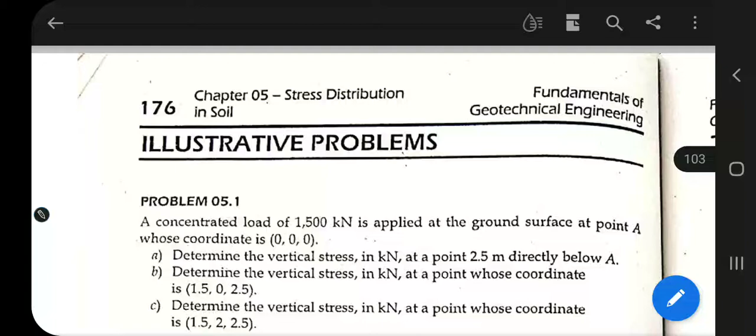Okay guys, here are some illustrative problems regarding our topic, stress distribution in soil. The first problem: a concentrated load of 1,500 kilonewton is applied at the ground surface at point A, whose coordinate is 0,0,0 at the origin. So this is 3-dimensional, and at that point our 1,500 kilonewton point load Q acts.

Now the question is, at point A, determine the vertical stress in kilonewton at a point 2.5 meters directly below A. So directly below A, the coordinates would be 0, 0, 2.5 - that's the lowest point. The question asks for the vertical stress in kilonewton. So the coordinates for part A are x=0, y=0, and z=2.5 meters directly below. What is the stress there? Only vertical stress exists there.

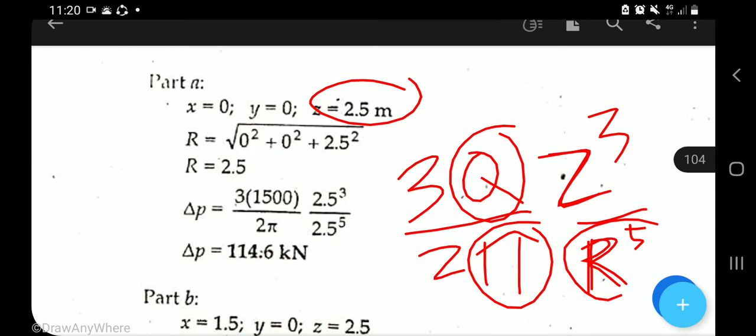To find that, we need to use the formula for delta P, the vertical stress increase due to a point load. The formula is delta P equals 3Q over 2 pi, times z cubed over R raised to the 5th power. The R is the distance - we use the distance formula for that. Q is the load, pi is a constant, and Z is our 2.5. For R, using the distance formula: 0 squared plus 0 squared plus 2.5 squared, we can get the value of R.

So 2.5 is the answer for R. Then we do direct substitution to get delta P. Substitute 1,500 for Q, since in our derivation last time, the big Q represents load in force. So 1,500 kilonewton is our point load Q. Substitute that, and for Z, which is clearly 2.5, and R raised to the 5th. Then calculate, and we get delta P, the increase in vertical stress 2.5 meters below the point load, equivalent to 114.6 kilonewton.

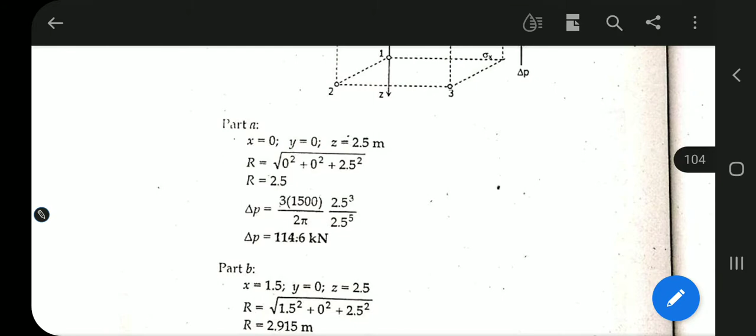So for letter B: determine the vertical stress in kilonewton again at the point whose coordinate is 1.5, 0, 2.5. So for letter B, the x coordinate is 1.5, y is 0, and 2.5 is the depth. The x of 1.5 is here, and y is 0, so no movement in that direction, just going down 2.5. That's what's being asked - what is the vertical stress at this point 2?

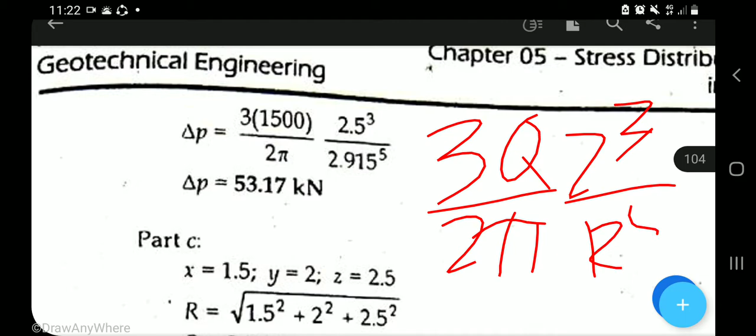Given our formula for point load again: delta P equals 3Q over 2 pi times z cubed over r raised to the 5th. But this time, different coordinates are being asked, a different position - unlike before, this isn't directly below the load's point of action. This time we have x=1.5 on the x-axis and z=2.5. By recognizing these coordinates, we can find the value of r, since we need it for the formula 3Q over 2 pi times z cubed over r raised to the 5th.

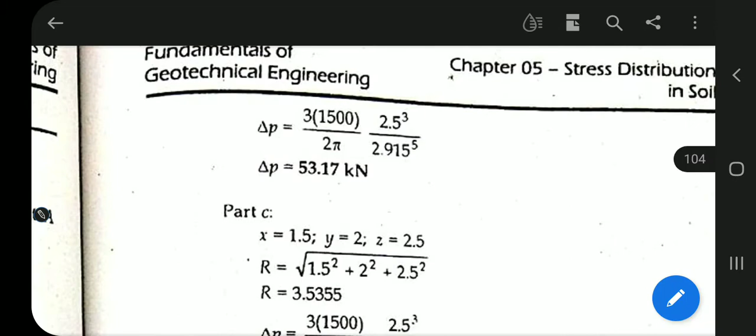Okay, so we get R equals 2.915. Back to the formula, substituting, then typing into the calculator, we get delta P as easily as this: delta P equals 53.17 kilonewton at this point. So the change in vertical pressure is 53.17 kilonewton.

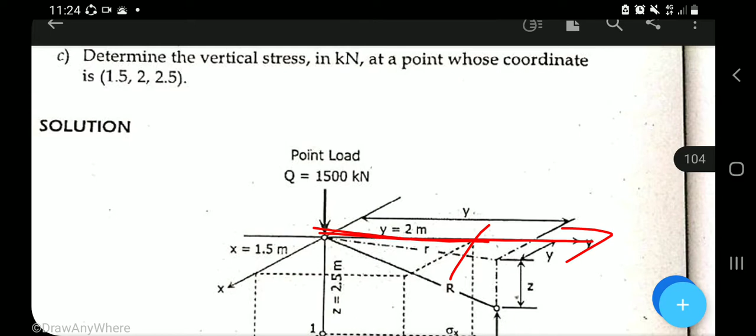For part C, determine the vertical stress in kilonewton at the point whose coordinate is 1.5, 2 meters, and 2.5. So our x is 1.5, going here. Then 2 is our y, counting up to 2. Then 2.5 going down in depth - that's what's being asked. We can get an R value from this. That's what's being asked: the vertical stress or delta P here. This is also equivalent to sigma sub Z, the vertical stress.

Change in vertical stress, okay? So ang gagamitin natin doon is yung equation ni sigma sub Z, kasi vertical lang yung tinatanong. At ganun lang ulit sa pagkuha kanina.

So using the distance formula: 1.5 squared plus 2 squared plus 2.5 squared, and that is equivalent to r squared. And then finding the value of r, we will get the answer 3.5355. So for the value of r, yon.

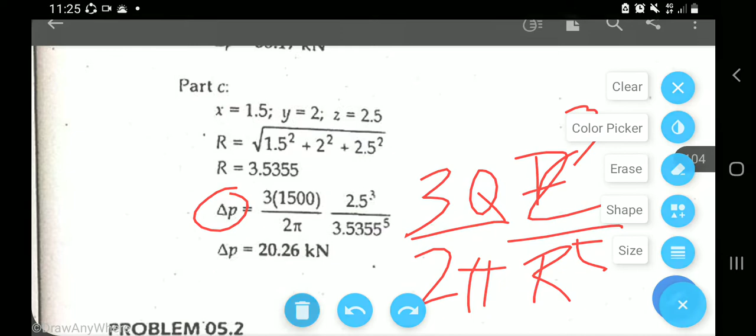And then substitute natin doon sa formula of the vertical increase in stress, so delta P: 3q over 2 pi times z cube over r raised to 5. So yung z natin, ayan, lipat doon, and then ito, substitute doon, and then type sa calc, we will get the delta P for that coordinate equivalent to 20.26 kilonewton. Okay, so that is an example of a point load, the vertical stress due to point load.

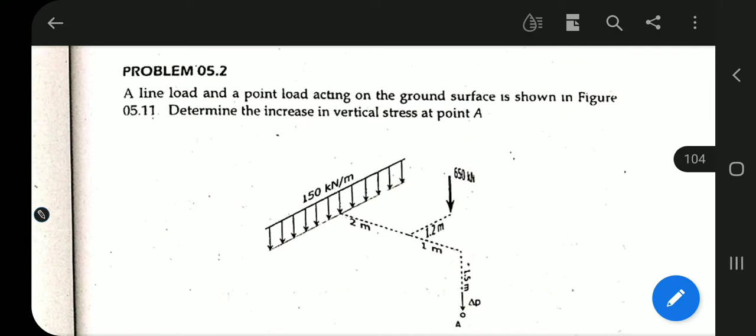Okay, now problem number 2. A line load naman and a point load. O, dalawa, isang line load at isang point load, so pinagsama. Acting on the ground surface is shown, figure 5.11. Determine the increase in vertical stress at point A.

Now, the vertical stress at point A from the line load is 3 meters, as you can see in the figure, 3 meters from the line load and 1.5 meters below that line load. Okay, and a point load is here, and that is 1.2 meters from the origin, and 1 meter from the origin also.

So ito yung x-axis and ito yung y-axis, and yung pababa, yun yung ating magiging z-axis. Yan, so yun yung mga coordinate. And because of that line load na ipinatong natin, and also the point load dun sa ground surface natin, magkakaroon ng change in vertical stress dun sa ilalim niyan, dun sa point A na yan, 1.5 meter below, delta P.

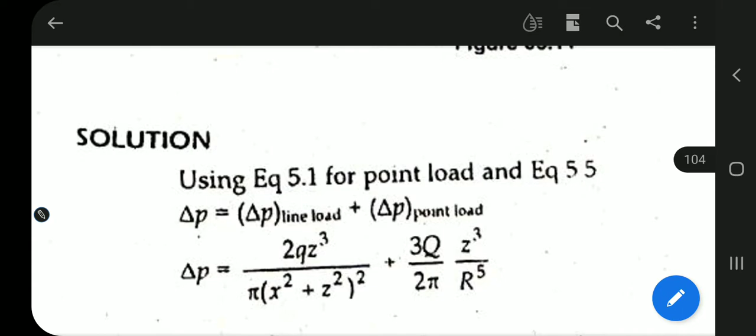Yan yung nandun sa ating lecture, ano? So 2QZ cube over pi. So this is due to line load and this is due to point load. So all we need to do is to find all the correct value for those parameters and variables.

Ano, so yung Q natin dito, yun yung line load natin. And then yung Q ditong malaki, that is the point load. Okay, and then yung Z, ay alin yung lalim? Yan yung lalim, ano. And then yung X, that is yung dimension na nandito. Ayan o, yan, so this is the X axis. Yan, so X yan. And then pag ganun yung Y. So and then pag ganun yung Z.

Ingatin, okay? So due to this line load and point load, magkakaroon ng vertical change in stress dun sa ilalim, dun sa point A. So ang kailangan natin is punan lahat ng mga value.

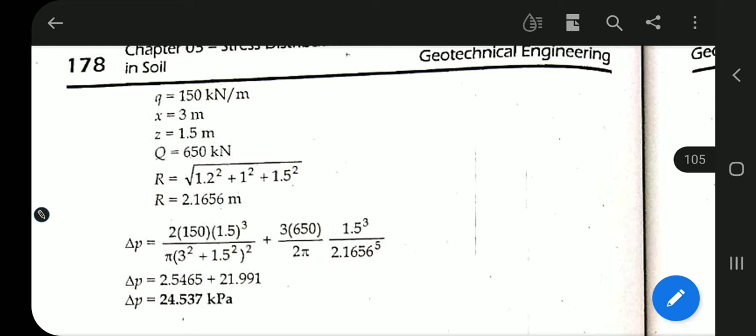So kunin natin si Q, itong Q maliit, okay na yan. And then yung Z natin, ito yon, yung Z, that is 1.5. Z natin, that is 1.5. And then yung X dito, ang ginamit niya is 3, kasi ang ginamit niyang axis papunta dito is 3. Okay, so dapat di ba pagka line load ay perpendicular dapat, okay, yung layo. Okay, so ito dapat perpendicular, di ba sabi ko? Okay, yung distance ito yung 3 and yung lalim that is 1.5.

So yan, so nasa line load pa lang tayo, line load. Okay, kung line load, then kunin natin yung R: 1.2 squared plus 1 squared plus 1.5 squared. So ito yung natin for the point load siya.

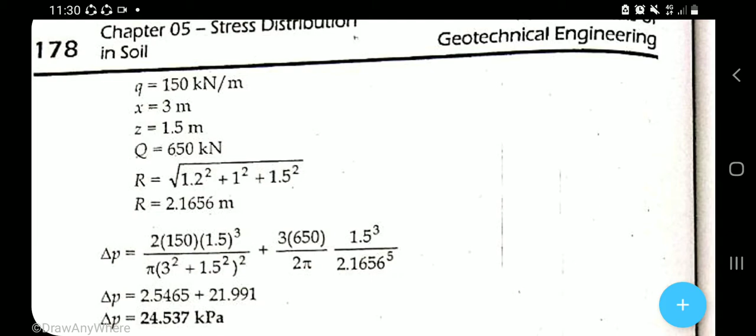So sa line load muna tayo. Yung ating punan natin yung formula, yung Z. So X at Z lang naman yung kailangan and then yung Q. So yung X is ito na, 3 meters, and then the Z is yung lalim. Ano ba yung lalim niya? 1.5 yung lalim niya.

And then substitute natin, ang mangyayari dyan is ganito: so ito yung 2Q, so ito yung Q, yung Q na maliit. And then ito na yung Z natin, Z cube. Ayan, at ito pi, constant. So ito yung X, and then ito yung Z. So yun lang, and then ipa-plus natin combination ng point load and line load.

So this is due to point load. So kailangan natin ng R. Ito yon, substitute doon, so maliit na yon. And then yung Z is the same lang, so 1.5.

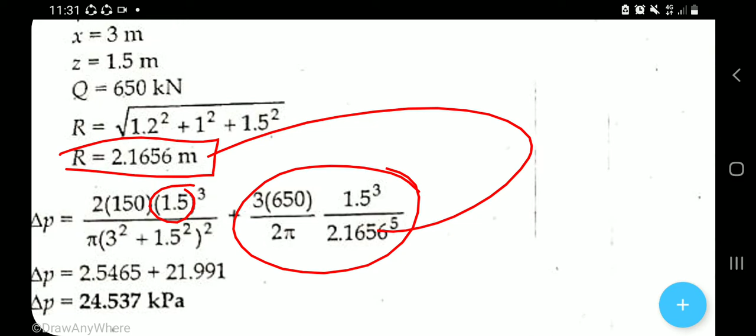And yun, ito naman yung Q natin, that is in point load siya, so in kilonewton, in force yan, 3Q over 2 pi. And then substitute na lahat, then calculate na natin, makukuha na natin to, and then the final answer would be equal to 24.537 kilopascal. Okay, that is an example of the combination of the line load and the point load action, dun sa ating lupa. So yan.

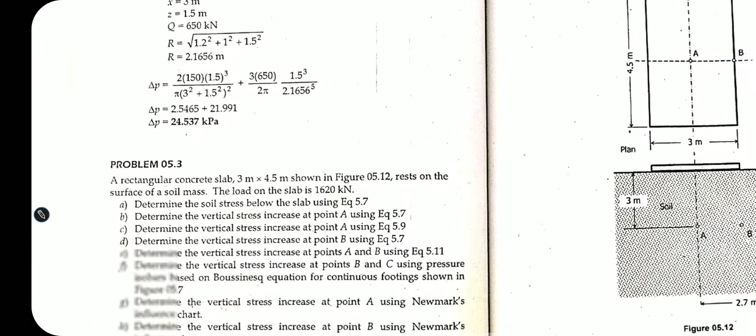Then problem number 3. So a rectangular concrete slab, slab siya. So alam naman natin ang slab, parang flooring kumbaga, and then 3 meters in dimension niya and 4.5 meters shown in the figure 5.12. So 3 meters and 4.5 meters yung dimension niya. And then rest on the surface of soil mass. So nakapatong siya dun sa ating soil mass. Okay, kung tawagin sa iba dyan sa site, slab on fill.

So the load on the slab is 1,620 kilonewton. So ito na yung load, ito na yung mag-a-act dun sa gitna. Okay, so kung may rectangular ka, so ang sabi is the load on the slab and in kilonewton siya, dun siya sa gitna mag-a-act, yung 1,620. And determine the soil stress below the slab using equation 5.7.

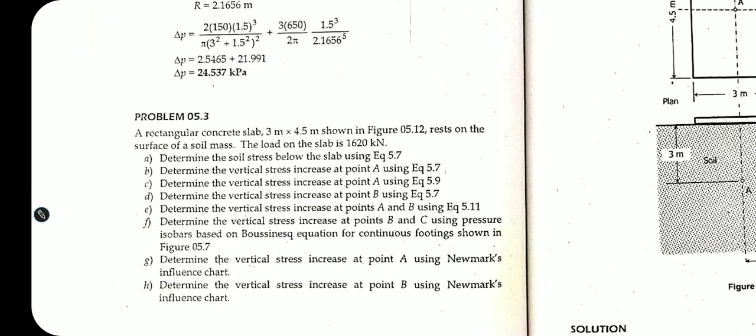So determine the soil stress below the slab, sa gitna. Okay, so ito yung plan, 4.5 by 3, concrete slab resting on the soil surface. Ito yung plan, and yung section niya, yung transverse section niya, ito. So kasama yung lupa. And then at point A, yun yung tinatanong. Okay, so 3 meters below the soil surface.

So yun yung tanong, determine the soil stress below the slab. Okay, so using 5.7. Ano pa lang to? Stress pa lang, below the slab pa lang. So yung stress na lumalapat pa lang dito. Okay, dito. Ito, yung stress dito na stress in contact with the soil and the slab.

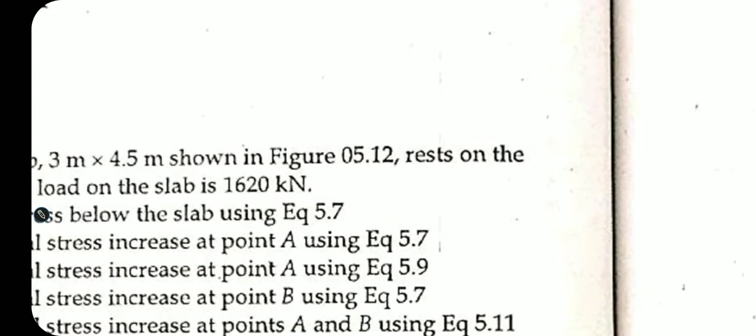So paano makukuha yun? So using the concentrated load at sa gitna, divide lang natin ng area. Yung area of surface of contact. Divide natin dyan yung force dito. Okay? So that is 1,620 divided by 4.5 times 3. So yun yung mangyayari sa A, sa ito. So 1,620, parang stress lang, P over A. Parang P over A, compressive stress. Or shall we say, the bearing stress. Yan, 1,620. Ito yung P, yung force, and area, 3 times 4.5. We'll get the stress below this slab equivalent to 120 kilopascal. Okay? So yun yung mag-a-act doon sa ilalim.

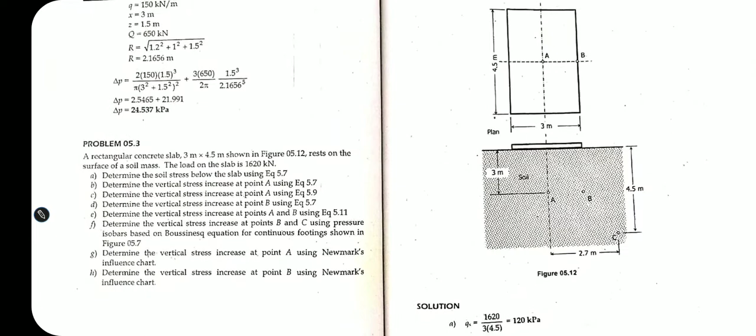Dito sa pinaglalapatan nito. Yun yung puwersa. And then number 2, letter B, determine the vertical stress. Ito na. When we say vertical stress increase, yan yung ating delta P. Okay? At point A, using 5.7. Okay? Using 5.7 na equation daw. So at point A, so nasa gitnang-gitna siya. And 3 meters below. So magiging Z natin dito is 3 meters, at gitnang-gitna siya. So yung equation for that 5.7,

so ito yung ating, yung sa may corner, yung I sub Z. Yun ang kailangan, yung may I sub Z. So QS times I sub Z. Yun. Okay, and that I sub Z ay may formula na napakahaba. But in this example, ay sa table niya inirefer. Table 5.2. Okay, so compute natin.

That is the vertical stress at the corner. Okay, vertical increase stress at the corner of a rectangular loaded area. Okay. So nasa gitna, ang tinatanong, nasa gitna. So sabi, kapag ganyan, using 5.7, hahati-hatiin daw natin yung ating slab. Na kung saan yung corner ng bawat rectangle na mahahati ay magko-coincide or intersect doon sa point of desired, yung point required, kung saan required yung ating stress increase. So mangyayari dyan, ganito. Ayan.

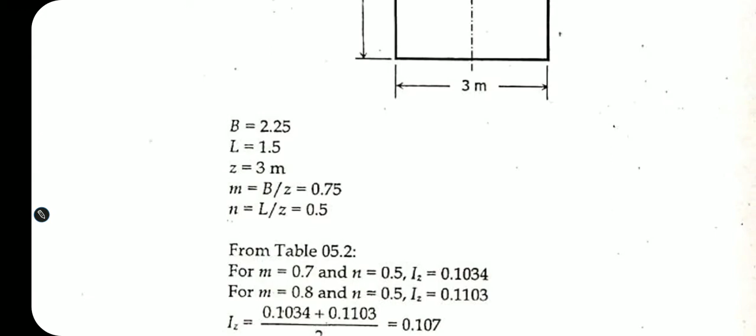So ito yung hinahanapan natin. So divide natin. So since nasa gitna, madi-divide lang siya into 4 equal parts. And that is, the center would be at this point, 1.5 and 2.25 yung kanyang base and length. So yung base is this time, baligtad. Kahit naman magkabaligtad to, okay lang yan kasi commutative property doon sa ating kapag I sub Z ang hinahanap.

Kapag ganito using this formula, no, kapag I sub Z, pero pagka I sub 4, I sub 3 ay iba. Okay, dapat i-consider natin na yung base is always less than or equal to the length kapag ganon dun sa kapag I sub 3. Okay, and then consider this rectangular area, itong shaded area. So consider natin yan and kunin natin yung vertical stress at this point. Drawing natin ng nakaganyan. So yung vertical stress dito, okay, sa point na yan. So ito ay 1.5 and ito is 2.25. So ano yung vertical stress at the corner?

Sa point, doon tumama sa point A. Okay, so using the formula delta P equivalent to QS times I sub Z, we have to first find the I sub Z using table 5.2.

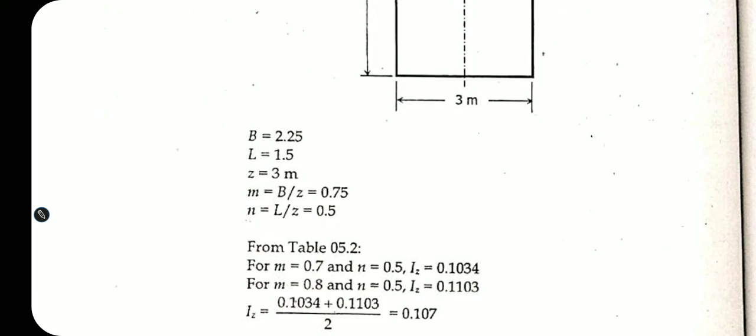Or using formula 5.7, but we need to find the values for M and N. The M is the ratio of the base and Z, and N is the ratio of the length and Z. So our base is 2.25, divide natin ng Z. Ano ba yung Z? Lalim, 3 meters. And ito yung magiging sagot.

And then the value of N is L divide Z, that is 1.5 divide 3 equal to 0.5. So now we have the value of M and N. Hahanapin lang natin yung 0.75 at 0.5 doon sa table. Saan ba yung table 5.2 na yun? Dito tayo titingin, balik tayo dito sa table 5.2. 0.7 at 0.5, yung M is 0.7, and then N is 0.5.

So tingnan natin kung saan tumutok. That is 0.1034. 0.7 at 0.5, 0.1034. 0.7 at 0.5, 0.1034 siya tumutok. Ayun, tama. Kaya naging ganito, 0.1034. Okay, kaya lang, ang M natin is 0.75.

Okay, kailangan nating mag-interpolate. Kunin natin yung sa may 0.8, and then yung gitna niyan, between 0.7 and 0.8, nandun yung I sub Z na actual. So kunin natin yan using table 5.2. So M 0.8 and at 0.5 na value ng N, ang value ng influence factor natin is 0.1103.

Okay, so yung nasa gitna ng 0.7 at saka yung 0.8 na yan, yun yung value ng I sub Z natin. So para makuha yung nasa gitna, we have to take the average of the two, or mag-interpolate tayo. So from 0.1034 and 0.1103, from 0.8, pwede tayo mag-interpolate doon. Or mas madali is average na lang kasi equal naman, nasa gitna eh, kasi 0.75. Kaya okay lang mag-average, pero kung halimbawa 0.71, mga ganun, kailangan mag-interpolate.

So 0.7, tapos... sa 0.7 siya, so 0.7 yung M, balik tayo. 0.75 yung M, tama, and 0.5 yung ating N. So M 0.75 and 0.5 yung N. Okay balik, so sa 0.5 yung N, 0.75. Okay so M 0.7, 0.7 siya, and tapos 0.5, ito yon, so 0.1034, and yung 0.75 nandito sa gitna.

E di kunin natin yung value nito, 0.8, 0.1103. So interpolate tayo, pwede nating i-interpolate at this value. So 0.75 yung nandito, 0.75 yung nasa gitna. Okay so 0.75 minus 0.7 over yung kanyang hinahanap, yung value x. Yan na yung I sub Z natin.

Minus 0.1034, and then that is equivalent to 0.8 minus 0.75, divided by 0.1103 minus yung 0.1034. Ayan, ito yung magiging I sub Z natin.

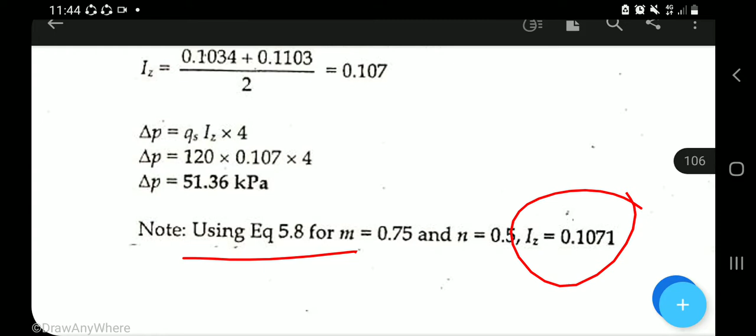I sub Z, so mas madali, yung tawag dito, divide na lang kasi nasa kalahati. So average na lang, nasa kalahati kasi siya, so pwedeng average na lang yan. So yun din yung magiging sagot, ano. So using the equation 5.8, yung mahaba, ang magiging sagot is 0.1071. So almost approximately equal, okay?

And since yung delta P dun sa point na yon is nakuha na natin, kailangan nating i-multiply saan? Sa 4, dahil apat na magkakaparehas to. Apat na magkakaparehas, apat yan, so kailangan nating i-multiply sa 4. Or i-plus natin lahat, summation lahat ng delta P's na yon. Okay, kaya minultiply sa 4 ito.

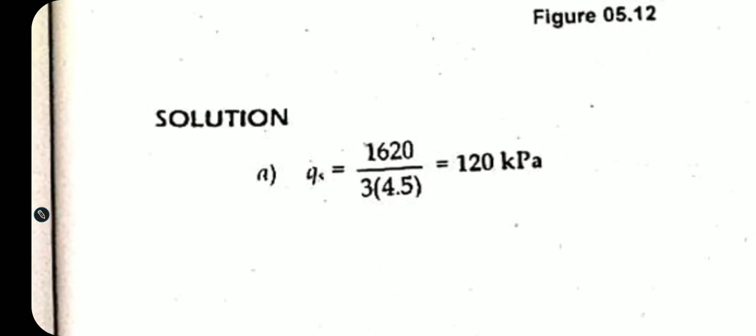Okay so ito, 17, substitute doon, and then 120, ito yung QS natin, okay? So yung QS natin dyan is given, ano? Given 1620, but yung QS na maliit dapat in kilopascal siya. So anong nangyari, ito na yung 120 na to, so divide the contact area of contact. So 120 kilopascal yung gagamitin natin as QS, okay? So yun, makukuha natin na sagot is 37.08.

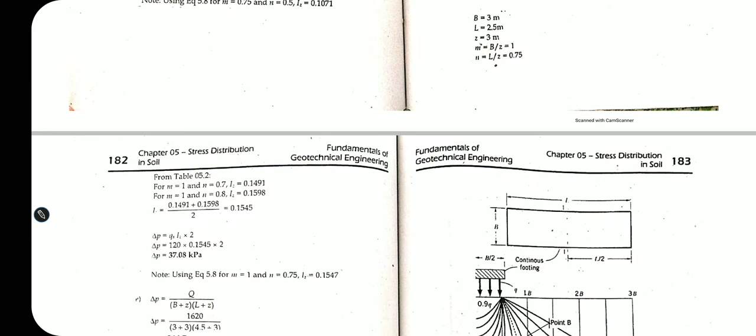Okay, so next question is letter E. Letter E, balik tayo. Okay, so at point A, determine the vertical stress. So at point C, at C pa lang. C pa lang tayo, no? Determine the vertical stress increase at point A using 5.9 naman. So sa gitna, yung 5.9, yun yung ating equation or the formula to find the change in vertical stress at the center of the rectangular block, rectangular loaded area. Ano, yan.

So at point, nasa na yan? So nandito pa lang tayo. So okay, 53, tama, so letter B pa lang to. So yung letter C, ito. So this time is I sub 4 naman ang meron doon. Kapag doon sa, ano, so mahabang formula din to.

Okay, but you can use table 5.3 to find the value of I sub 4. But kailangan natin kunin yung M1 and N1. Okay, so yung M1 is the ratio between the length and the half of the base, or B over 2. Okay, and makukuha natin yung M1. And yung N1 na maliit is a ratio between the Z, yung lalim, over the half of the base.

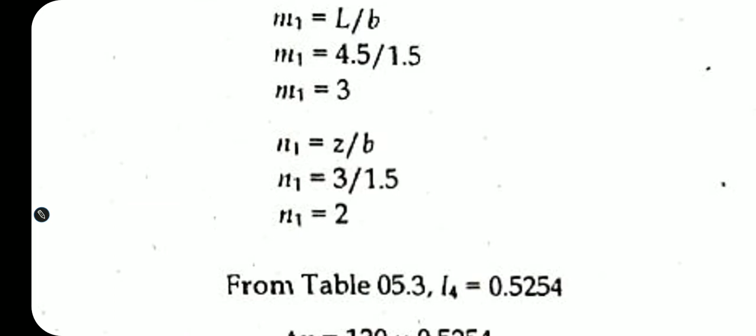So makukuha natin na N1 is 2. Then, using table 5.3, balik tayo sa table 5.3. Ano bang value nga ulit? M1 is 3 at 2 ang N1. Okay, M is 3, N is 2, 32, to find the value of I sub 4, ayun. So 0.5254. 0.5254 ang value ng I sub 4 doon.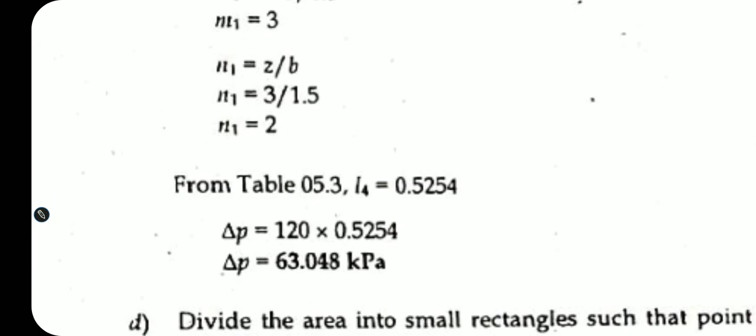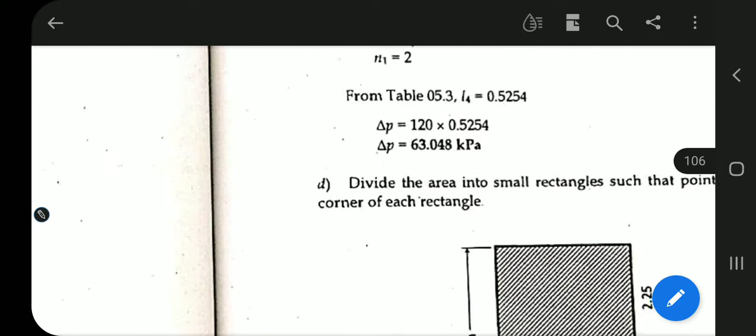Ayun, so tama. From table 5.3, ang value ng ating I sub 4 will be equal to 0.5254. And then use the formula, yung QS multiplied by I sub 4, and then you will determine the value of the delta P, or the increase, the vertical increase in pressure, vertical increase in stress dun sa point na yon. So multiply lang natin. Ayun, ang sagot, 63.048 kilopascal. Okay, yon. So as you can see, mayroong malaking discrepancy.

So 63.048, compare nyo dito. So may discrepancy, kanya-kanyang formula kasi ang nagbigay, kanya-kanyang tao. So i-indicate naman or i-state sa problem kung alin yung gagamitin na method or way, use equation 5.7, use the Boussinesq equation, okay, mga ganun. Use the isobar, pressure isobar, mga ganung bagay. So naka-indicate naman doon. I-indicate natin sa problem. Okay, next, letter D.

Ang tanong is determine the vertical stress increase at point B using 5.7. Nasaan ba yung point B dito sa figure? So ang point B natin is here, katapat nito. But dapat given itong distance na to. So ang point B natin is nandun sa sulok pala, nasa sulok, meaning kalahati nitong B. So 1.5 daw, okay? So 1.5 and 3 meters yung lalim.

Okay, kunin natin, so but using 5.7 kailangan nating i-divide sa to yan. Kasi kailangan, dito ang hinahanap natin dito sa point na sa may point B, dito yung hinahanap na point na stress, kailangan nating kunin yung delta P due to this area. Okay, so due to this area. So paano yan? Divide natin sa dalawa.

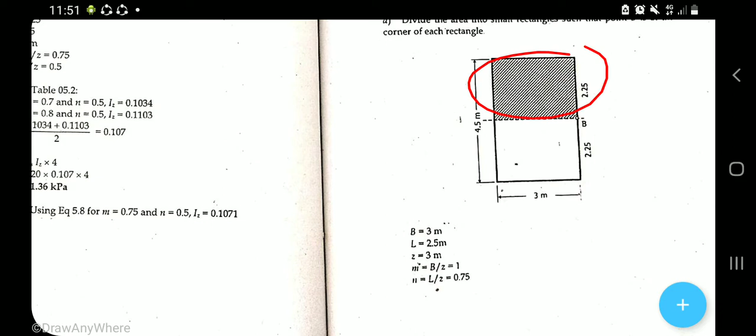Tapos, na kung saan yung point na yun ay magko-coincide sa isang point dun sa point of target natin, point na target nating malaman. So ganyan. And alamin natin yung B. Ito muna, isolate natin to, ito muna natin i-analyze, kasi nasa gitna naman yan. So multiply by ito na lang mamaya. So ang ating B is equivalent to 3, so 3 ito, 3. And this, yung kalahati naman ng ating length ay 2.25.

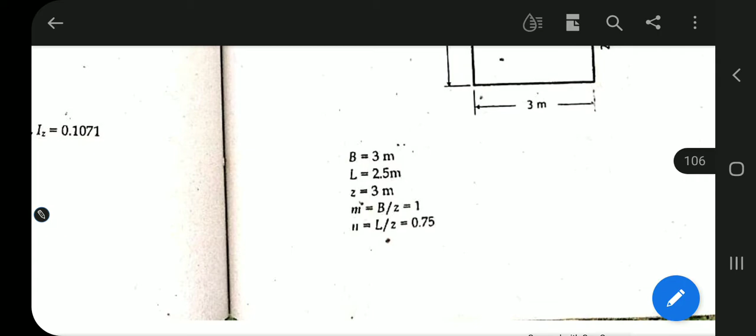Okay? Kasi ang formula para makuha yung pressure at this point, at the corner of the rectangular loaded area is yung QS ulit times I sub Z. Basta sinabing equation 5.7, yan yun. Kaya lang, kailangan nating makuha is yung I sub Z natin. So I sub Z. Ayun, but bago natin makuha yung I sub Z, kailangan natin kunin yung M and N. Okay, using this data, so yung value ng M is 1 and yung value ng N is 0.75. So using table 5.2, kung paano ko binasa kanina, ganun lang yon. Ang magiging I sub Z or the influence factor at M equals 1 and N equals 0.75 is 0.14. Okay, so 0.14.

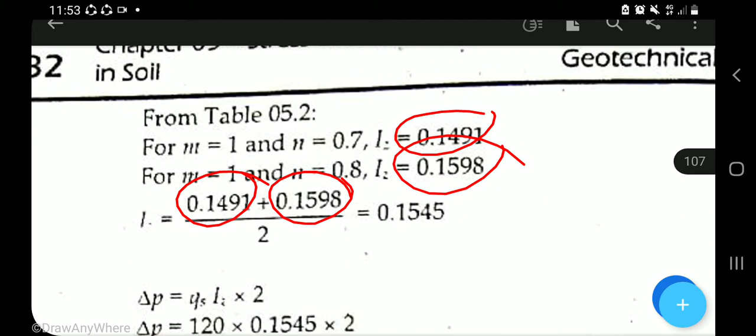Pero pwede nyo naman gamitin na direkta agad ito, substitute dun sa ating formula na mahaba. Ito kasing table na to, table 5.2, dun lang din ang galing dun sa formula na mahaba. Okay, kaya lang hindi sumasakto dito, kaya ang ginagawa is inia-average na lang para makuha yung gitna. Tama, ganun lang. At yan, so since 0.75 nasa gitna, ibig sabihin i-divide to natin to, yung dalawang I sub Z, so I sub Z1, I sub Z2, divide by 2, so ito na yung magiging actual I sub Z natin.

O influence factor na kailangan i-multiply doon sa ating Q sub S. Okay, yan, so and then bakit naka-multiply sa 2? Kasi dalawa ito, dalawa, isa nito at isa nito. Okay, then lalabas yung change in vertical or the increase in vertical stress dito sa point B na to. Yan, so balik, so our delta P now is 37.08 kilopascal. Huwag niyong kalilimutan yung 2 ha, okay kasi dalawa yan. Okay, note, using equation 5.8, we can determine also the value of I sub Z or influence factor equivalent to 0.1547.

Almost equal doon sa ating table, almost the same. Now, letter E naman. Determine the vertical stress increase. Ganun pa din, Delta P ulit yan, at points A and B.

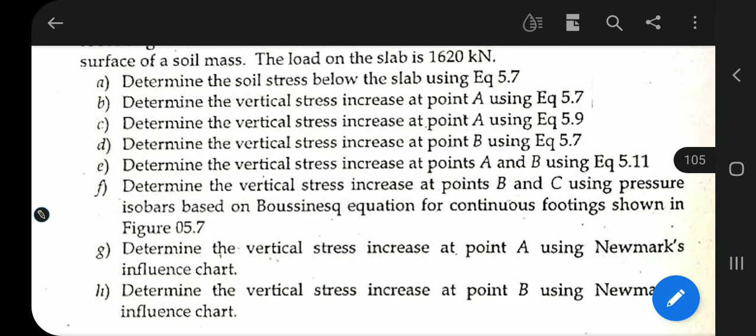Okay, so dalawang tinatanong using equation 5.11. Ano ba yung equation 5.11? Diba ito yung ating approximate method. Okay? So ganito yung ginawa, yung Delta P natin, ganito yung formula.

So using approximate method. Meron ditong Q, yung load slab. And yung Q natin is ito, concentrated. And yung area, yung nasa ilalim, trapezoidal, nasa ilalim. Yan, so ito ay B.

Tapos ito ay Z over 2, Z over 2 din itong kabila. And ito naman yung L. Tapos Z over 2 ito, and Z over 2 yung kabila. Meaning to say this length is B plus Z, and ito ay L plus Z.

Right, okay. Then therefore, the vertical stress at this plane is equivalent to using equation 5.11, the approximate method. So, force over this area. Ano ba yung area nito? Nasa ilalim, yan. So B plus Z times L plus Z. All we need to do is find the value of that B plus Z and L plus Z.

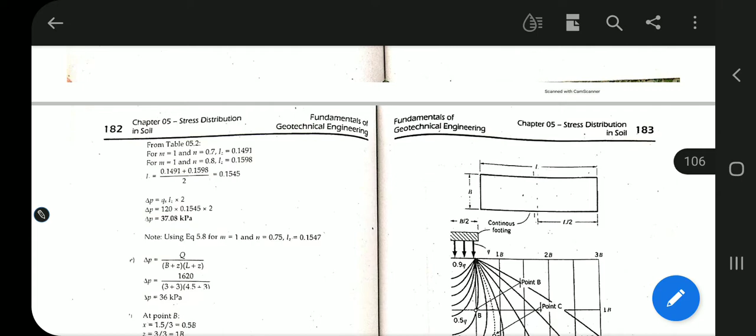Yan, so from the, yung ating B is 3, and yung ating L is 4.5. Right? So yung Z natin, yun yung lalim. Ano yung lalim na yun? So 3 meters. Balikan natin.

Letter E tayo. The vertical at point A and B, so dalawa. So at point A and B, so magkalibel lang naman sila. So meaning, same lang sila ng pressure.

Okay, using the approximate method. Pareha silang nag-lie doon saan? Doon sa ating plane, doon sa area. Plane of area na kinonsider, na we need to consider. Yan, ito yan.

O, kailangan natin tong area na to. And sa kabila, meron din. So kung ito ay B dito, sa kabila na isa, ito na may L. So ganun din, trapezoid din. And then, this length is L plus Z, and this length naman is B plus Z.

Now, multiplying this by this, kukuha yung area kung saan nandun yung point A and B. And then dun lang natin i-divide yung ating Q, yung ating concentrated load na Q sa gitna. And then we will get the approximate value of the vertical increase in pressure dun sa point A and B, equivalent to 36 kilo Pascal.

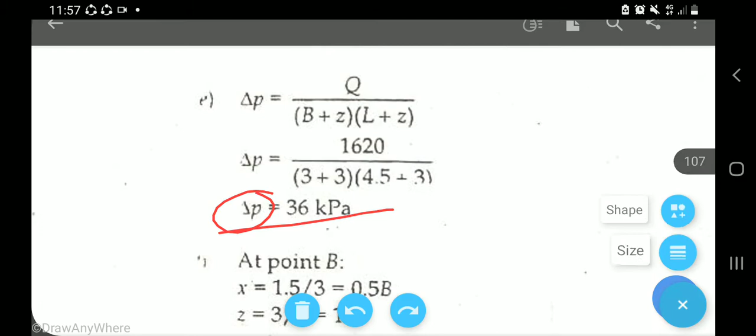Okay, now E. So tanong, EF. Letter F naman tayo, balik. Letter F: determine the vertical stress increase at point B and C using pressure isobars based on Boussinesq equation for continuous footings shown in figure 5.7. Oy, using the pressure isobars daw.

So sa letter, ano tayo? Using the pressure isobars, ito yon. Yung pressure isobars yan. So, and ang ating ano ay rectangular, continuous. So yung magiging base natin ito, and then yung length is yan. So ito yung diagram, dito lang tayo magbe-base.

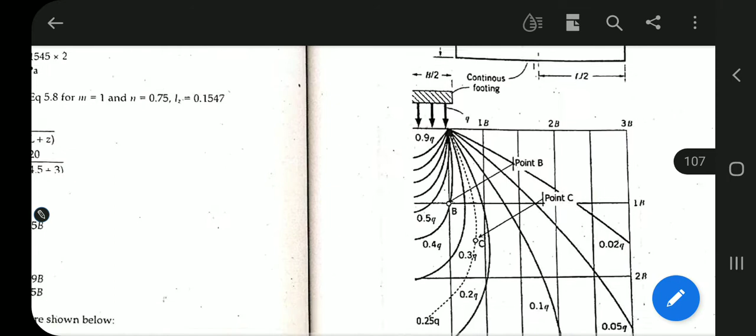Okay? So at point B, unahin natin at point B. Ang target natin, pag using isobar, pressure isobar, kailangan natin i-convert yung axis, yung location ng point or the coordinate of point into mga B, yung mga B, in terms of B. Okay, in terms of B dapat. So paano yun? So kung at point B, the X is...

1.5, tama? At point B, di ba, ang X natin is 1.5 meters. So in terms of B, paano natin ma-convert yan in terms of B? So we have to divide it by yung lalim, 3. Okay? So dapat 0.5 B ito. Yung X will be equal to 1.5 divide 3, so 0.5 B, okay, tama?

0.5 B, bakit 0.5 B? I-divide natin siya kasi yung base natin, right? Yung base natin ito, 3. Okay, dito tayo magbabase, so 3. So i-divide natin ng 3. Ang mangyayari, in terms of B na. Kung i-divide natin ng 3, ito, so in terms of B na yung ating X.

Okay? Oh sige nga, ibalik natin to. Ibalik natin itong 0.5 B sa X coordinate. So 0.5 B, multiply natin ng 0.5 B... ano ba ang base natin? Ano ba ang base natin, 'di ba? 3? Tama, 3. And 3 times 0.5 is equivalent to 1.5, 'di ba? Tama, balik lang sa 1.5.

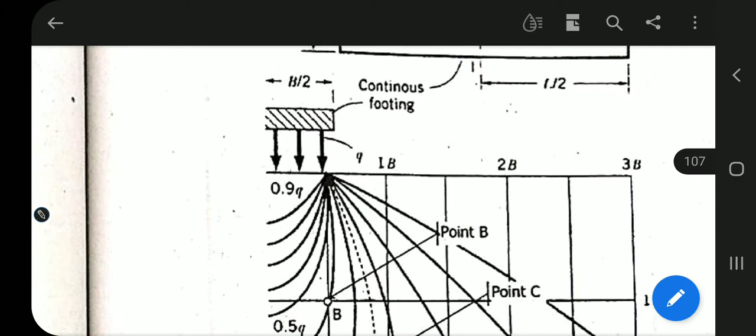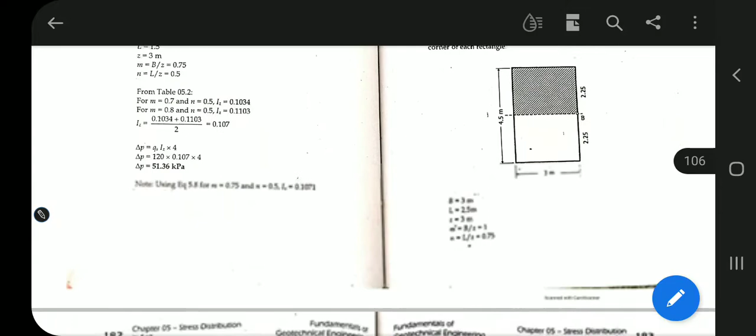At point C, the X is 2.7. Let's check it here, going back - the X is 2.7 and the Z is 4.5. That's point C. Let's convert this into B terms. In terms of B, our point C: 2.7 in terms of B is 0.9B, and 4.5 in terms of B is 1.5B. That's correct because you multiply 0.9 by B which is 3, giving 2.7, which is correct. So 0.9B is the X at point C. Let's go back to the diagram.

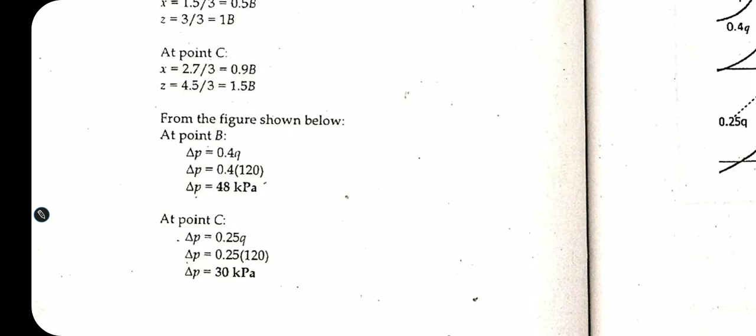Pressure isobar: 0.9B, that's the X, so it's located here. If 0.5 is here, then this is 1, and being 0.9 it's at 5,6,7,8,9, so it's located there, in that part. And for our Z at point C: 4.5 is 1.5B, so looking downward, 1.5B is 1 plus half, 0.5, so that's 1.5B. Let's continue straight to that point, and the 0.9 here, there it is.

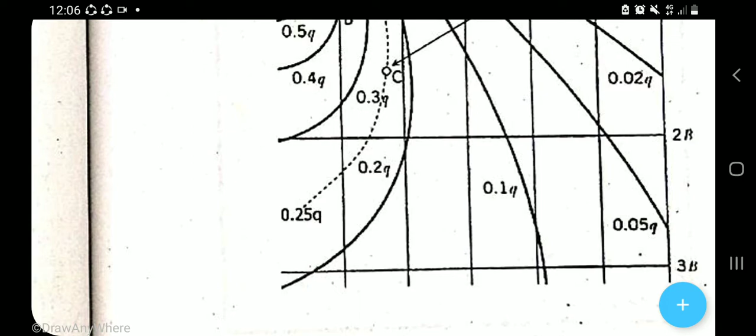Now if we determine the equation of the line at that part, at point C, we follow the pattern of the line. When we trace it to here, it's almost at the halfway point - halfway of this whole. So the difference of this line is between 0.2 and 0.3. So this is 0.3 - minus 0.2, 0.2Q, also 0.1, 0.1Q, that's the difference. So 0.1, and at this different point, halfway - if we check, halfway between 0.2 and 0.3, what's in the middle of 0.2 and 0.3? That's 0.25.

So 0.2, 0.3 and 0.2, almost halfway between them, so we have to take the average: 0.3 plus 0.2 is 0.5, divided by 2, so that's 0.25Q. That's what corresponds to point C. So that's it - 0.25Q is our stress at point C using the pressure isobar, so 120 times 0.25, that's the answer. Okay, what other question is here? So, determine the vertical stress at B and C using pressure isobar - that's done. Now let's move to letter G.

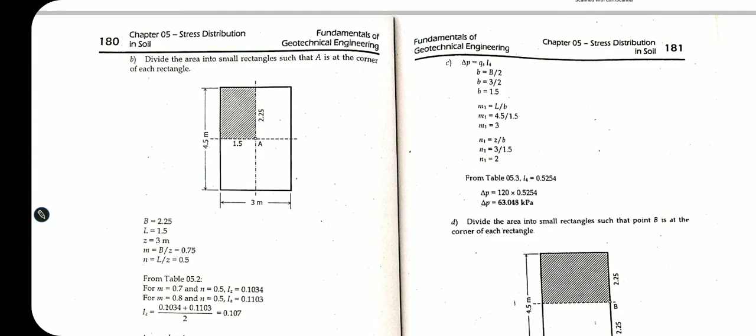So, in one problem we already discussed almost all the topics. May line load, point load, combination of line load and point load, using pressure isobar, using the Newmark's chart, and also using the I sub 4. Okay, we discussed almost all of that.

Now, a square footing, problem number 5.4. A square footing is loaded as shown in figure 5.13. The center of the base of the footing is at 0,0,0, so that's the origin. Determine the increase in vertical stress at the point whose coordinate is 3,0,4 using pressure isobars based on Boussinesq's equation for the square footing shown in figure 5.7. So pressure isobar is what we'll use.

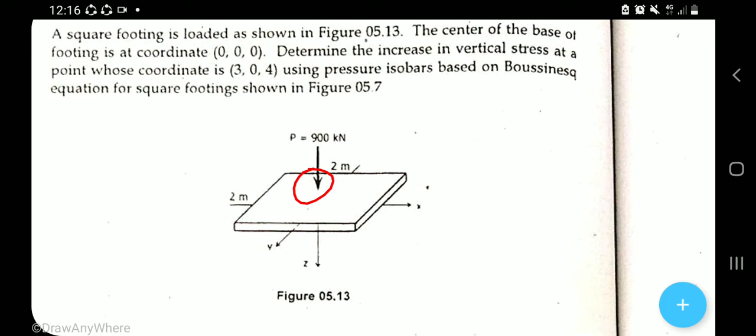Okay, pressure isobar, and this is the figure. So, square footing, having legs of 2 meters, and the concentrated load is equivalent to 900 kilonewton directly acting on the centroid of the square footing. So the Q, small q, we just divide by the area, 2 times 2. So 900 divided by 2 times 2 equals 225 kPa.

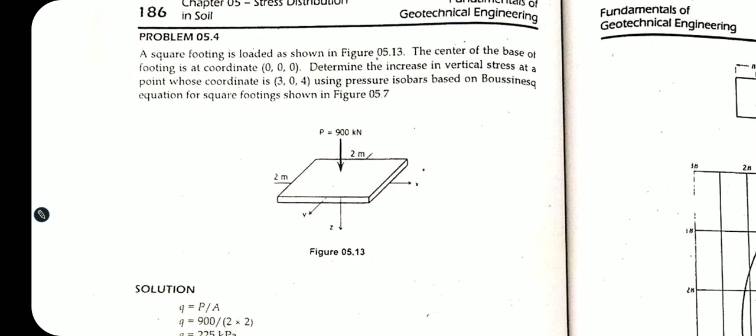Okay, using the pressure isobar, the x value is 3, right? In terms of B, our base is 2. It's square. So for the 3, we divide it by 2, and that is 1.5. Then we multiply by b to get back to 3. So that is 1.5b, equivalent to our x.

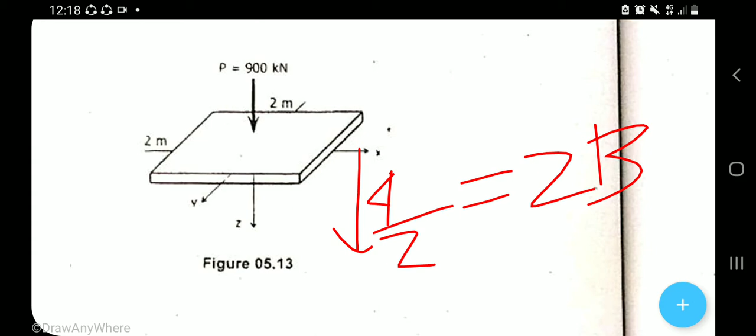And the 4 meters which is z, the depth, is 4 meters. So we convert that to b. We divide it by 2 meters which is b, so it becomes 2. And then that's 2b to get back to 4. So 2b is our depth, the z.

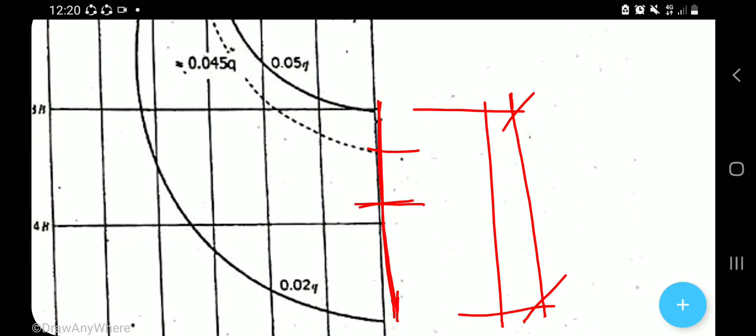So 0.05 minus 0.02 - that's the Q here. So half of that, about 25%. So 25%, rather 75% - it drops here at this line. So this is 0.05 minus 0.02. Let's call this A. So this line is approximately equal to 0.75A - it's like it hits at 3/4 of it.

So let's take that. And then once we get the 0.75A, the difference between these two, we add 0.02Q. And that would give us the approximate value for the stress: 0.045Q.

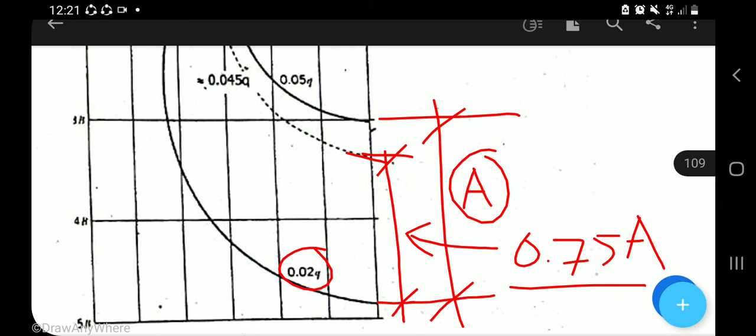So that's the stress. Let's go over it again. So it hits here at 75%. The difference, let's call that A. And this length is 0.75A. And we add that 0.75A to 0.02Q, and that's approximately equal to this line, so 0.045Q - that's our stress at that point, at the required point 3,0,4.

That's why it's 0.045 times Q - that's our stress. Okay, Q is 225 kPa. So, our vertical increase in pressure is 10.125 kilopascal. That's the answer.

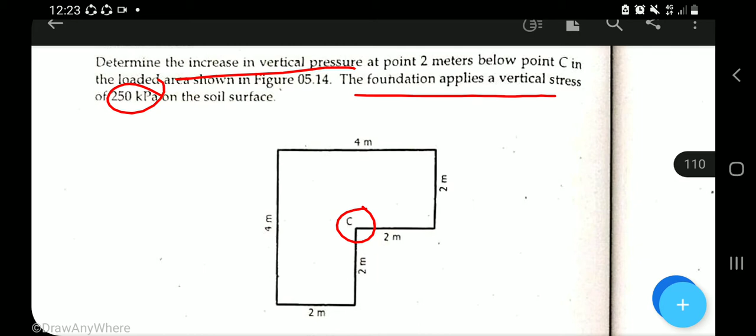Okay, so the next problem is: determine the increase in vertical pressure at point 2 meters below point C. So here's the figure. Determine the increase in vertical pressure at point 2 meters below point C. So this is the plan, then going down 2 meters below - what is the increase in vertical pressure there for the loaded area shown? The foundation applies a vertical stress of 250 kilopascal uniformly loaded on the soil surface. This is the area of contact on the soil surface. So the question is the stress below that, 2 meters below. So, how do we solve that?

Okay, ang ginamit, wala siyang in-indicate, ang giniben lang niya is ito. So pwede natin gamitin is the Newmark's chart. Ilagay natin, i-plot natin itong plan na yan dito, na kung saan ay yung point C is papatak doon sa gitna. Okay, ganyan mangyayari.

2 meters, yung B. Let's say yung ating B is, yung lalim, 2 meters. So kung 2 meters yan, dapat yung itong line na to is equivalent to 2 meters.

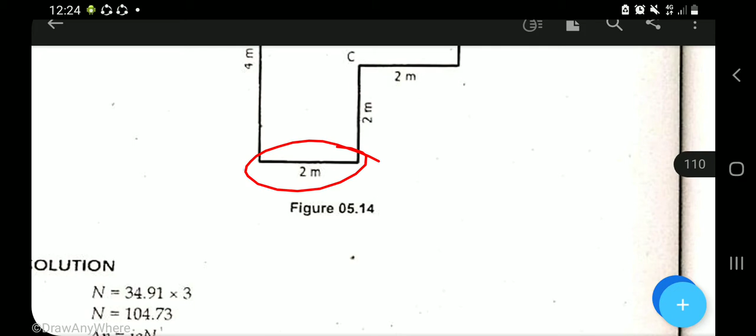And that 2 meters is the same dito, dun sa dimension ng ating loaded area. So pag ipinlat natin sa Newmark's chart, kung ano yung haba nito, yun din ito, kasi 2 meters din siya, di ba? And kung ito naman kabila, 4 meters, ay didodoblihin mo. Doble haba, pamula dito, 2 meters.

2 meters. So guhit lang. Tapos dito, ganun din, 2 meters. At saka bilangin lang natin kung ilan yung nasakop nito, at saka nitong maliit na to. So isolate natin isa, kasi typical naman, isolate natin ito.

So bilangin natin kung ilan yung nasakop, tawag dito na element. 1, 2, 3, 4, 5. Okay, 1, 2, 3, 4, 5, 6, 7, 8, 9, 10, 11, 12, 13, 14, 15, 16, 17, 18, 19, 20, 21, 22, 23, 24, 25, 26, 27, 28, 29, 30.

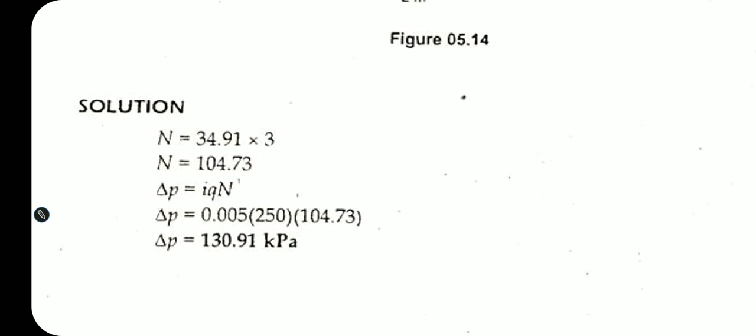30. At itong part na to, 0.6, 0.9, 0.9, 0.6, 0.15. Basta yung kayo na ang mag-estimate kung ilan. So ang lumabas doon is approximately equal to yung value ng n. Yung value ng n ay ito, inirekta niya na agad. So 34. Ito yon, diba? 30 yung bilang ko kanina plus yung mga maliliit pa.

So 4.91, so since tatlo, so times 3, yung total nung lahat na nasakop na elements nung ipinlat natin yung ating foundation, ano, so that is 104.73. And then substitute natin dun sa formula ng delta P or the vertical increase in pressure. So I times Q times N, yung I is the influence value, 0.005, times Q, yun yung ating 250 kilopascal, and yung ating 104.73 na value ng N. So our delta P or the increase in pressure at point C 2 meters below is 130.91 kilopascal. So that is using by Newmark chart, 130.91.

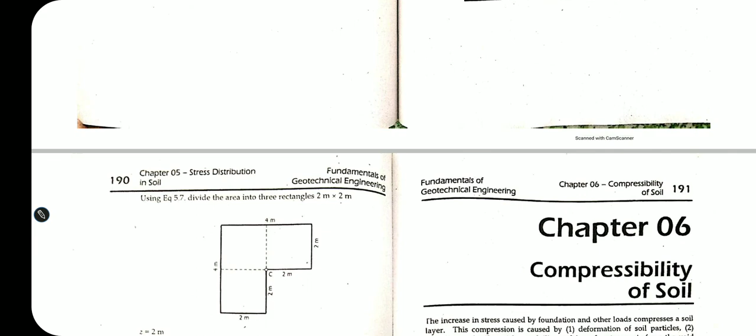May isa pa siyang ginawa, using the Boussinesq equation, Q times I sub Z, the vertical stress at the corner, yung ganito, at the corner of the rectangular loaded area. So this time ang ginawa niyang rectangular loaded area is tatlo. Okay, tatlo. So kinuha niya yung rectangular, the stress 2 meters below at C using this area muna.

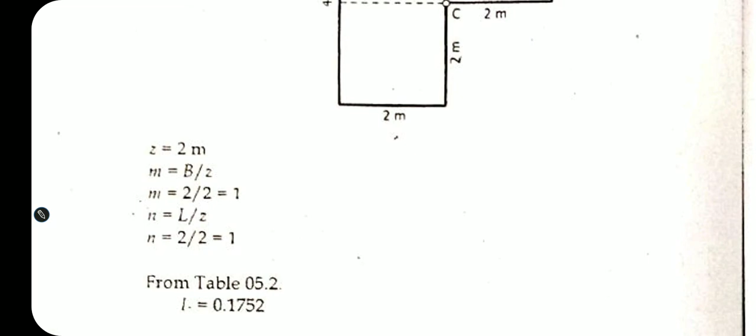Okay, using this area. So 2 yan, 2 meters, 2 meters. So kunin natin yung M and N. So 2 over 2 and 2 over 2, yung B over Z and L over Z. Okay, nagkataon na parehas silang 1.

Okay, so kung 1 yan, ay balik tayo sa table 5.2, and that is equivalent to 0.1752. Okay sige, balikan natin, tingnan natin kung tama. So 1 yung M and 1 din yung N. Okay check natin, baka kasi nagkamali. 1 yung M. Okay, 1 yung M.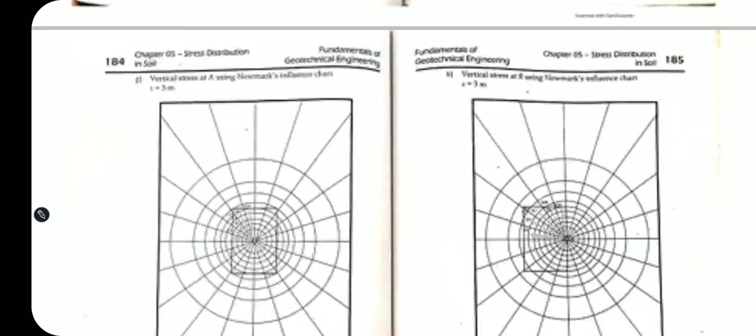So dito tayo. 1, 1 yung M, and 1 din yung ating N. Tingnan natin, 0.1752 dapat. Okay, 0.1752 dapat ang I sub Z natin. Okay, so tama, no? 0.1752.

So from the table 5.2, or you can use the formula for the I sub Z, that is yung mahaba. Substitute niyo lang, then you can get the answer or the value for I sub Z ay approximately equal to 0.1752 also. And substitute lang dun sa value, dun sa ating formula using the equation 5.7, if I'm not mistaken. So delta P is equals to Q times I sub Z times 3.

Bakit 3? Tatlo siya eh. Kasi ito pa lang yung hinanap natin kanina, di ba? Ay yung effect ng lahat. So times 3 natin. So 250 times the quantity of 0.1752, that is the value of the influence factor, and times 3 dahil tatlo. And that would give us an answer of 131.4 kilopascal for the value of the vertical increase at point C 2 meters below.

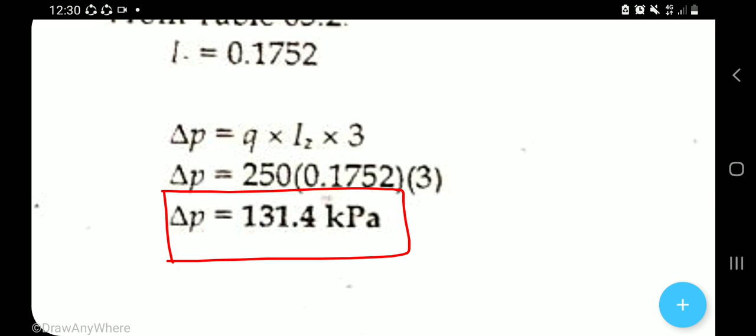Okay, 131.4. Okay, that is also approximately nearly equal to this 130.91 using the Newmark chart, and dito naman sa kabila is 131. Okay, malapit yung sagot. So yun, that's all for the stress distribution in soil problem solving. Thank you.